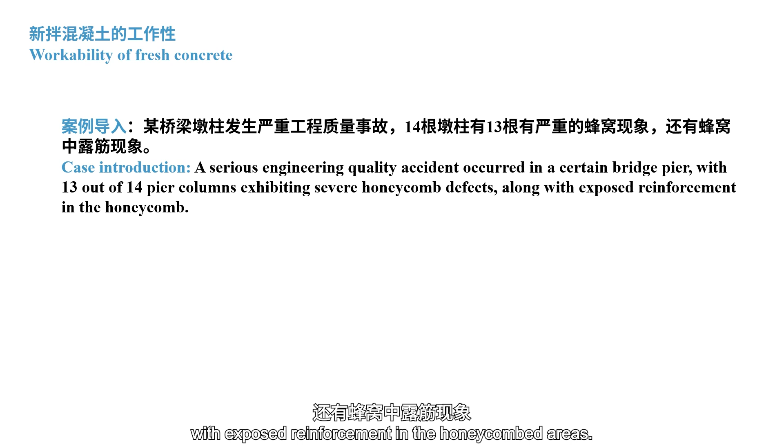Let's look at a real case. A serious engineering quality accident occurred in a bridge pier, where 13 out of 14 pier columns exhibited severe honeycombing, with exposed reinforcement in the honeycombed areas. Concrete was found to be involved in the following issues during the construction review.

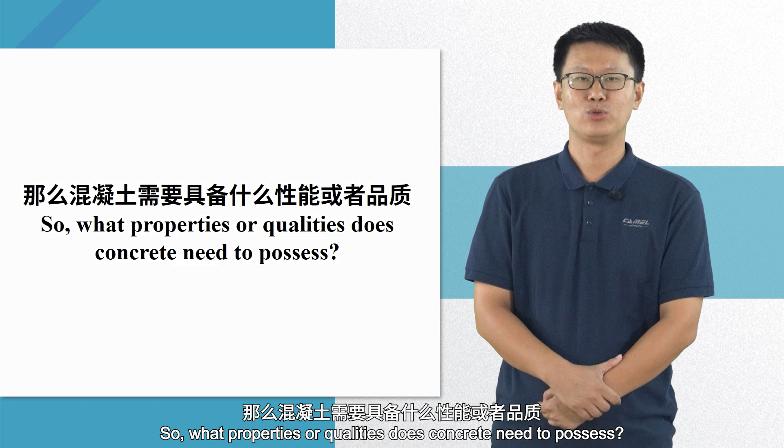So, what properties or qualities does concrete need to possess? Today, the teacher will reveal them one by one to the students. Concrete is an artificial stone, formed by mixing cementitious materials, aggregates, water, and appropriate admixtures and additives, and then hardening.

Considering factors such as the structural characteristics of buildings, properties of raw materials, construction techniques and equipment, construction environment, and quality management, fresh concrete needs good workability for mixing, transporting, pouring, and compacting. Hardened concrete, after curing and solidification, requires sufficient strength, certain deformability, and excellent durability to ensure long-term safety use.

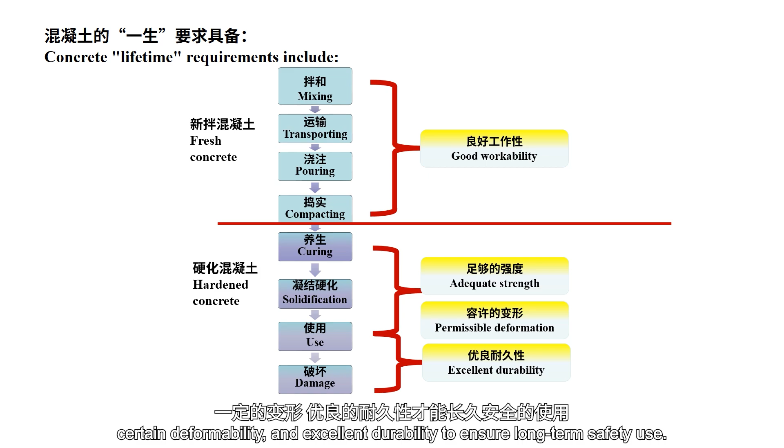Next, we will learn about the properties of fresh concrete workability, also known as its ability to be worked. First, let's look at the definition of workability. Concrete's ability to be easily worked during all stages of construction, ensuring uniform quality and cohesion of its components, and compactness of its form. The workability of a concrete mix indicates the ease of construction operation and its resistance to segregation.

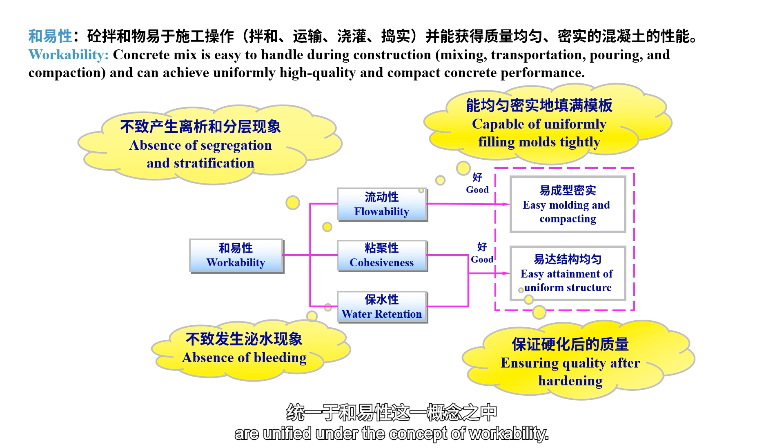Workability is a comprehensive concept composed of properties such as fluidity, cohesion, and water retention. The interrelationship and contradiction among these properties are unified under the concept of workability. Fluidity, also known as consistency, refers to the ability of a concrete mix to flow and fill molds uniformly, under its own weight or during compaction by construction machinery, reaching all corners evenly.

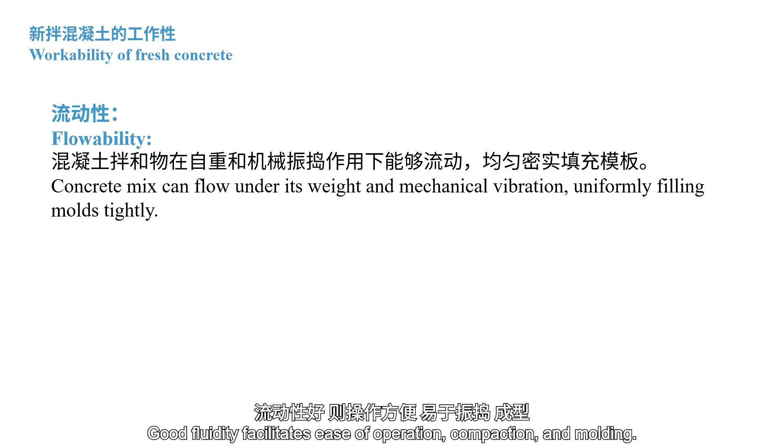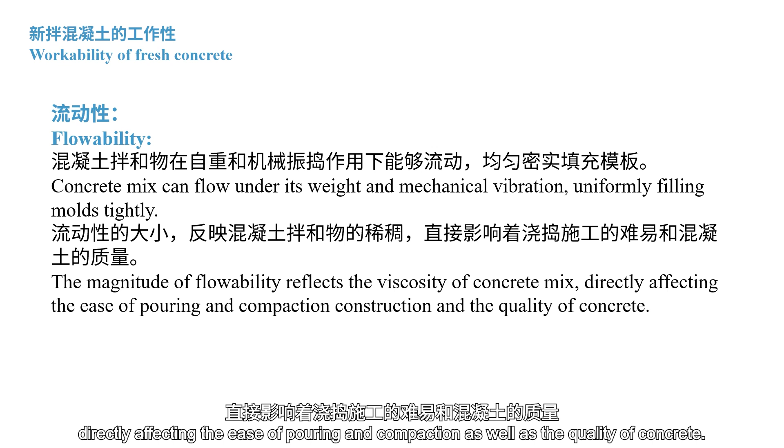Good fluidity facilitates ease of operation, compaction, and molding. The magnitude of fluidity reflects the consistency of the concrete mix, directly affecting the ease of pouring and compaction as well as the quality of concrete.

Depending on construction requirements, fluidity is classified as stiff concrete, slump 0 to 10 millimeters, plastic concrete, slump 10 to 90 millimeters, flowable concrete, slump 100 to 150 millimeters, and highly flowable concrete, slump greater than 160 millimeters. The slump of concrete should be determined considering construction conditions, section dimensions of components, reinforcement density, compaction methods, etc.

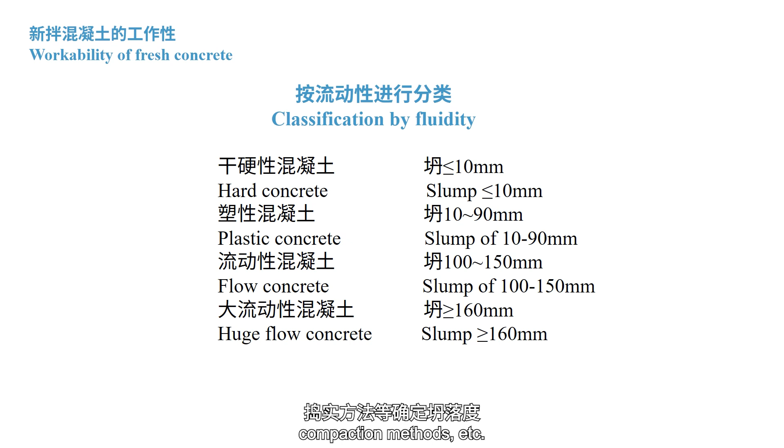Cohesion refers to the ability of concrete mix components to stick together during construction, preventing segregation and maintaining overall uniformity. Good cohesion ensures that concrete mix does not segregate or separate during transportation, pouring, molding, etc., thus ensuring uniform internal structure of hardened concrete. Poor cohesion in concrete mix results in honeycombs and pockmarks after hardening. In large concrete mixes, even dog holes may appear.

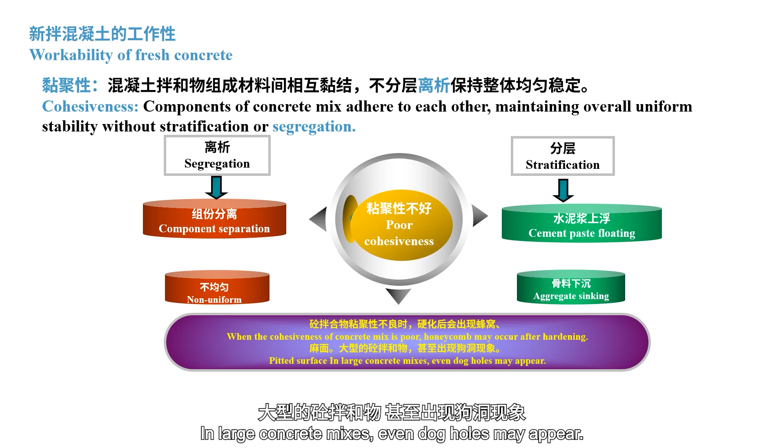Water retention refers to the ability of concrete mix to retain water and prevent its separation. Concrete mix with poor water retention allows water to easily migrate from the interior to the surface, forming channels, which reduces the compactness of concrete and leads to shrinkage cracking, ultimately reducing its strength and durability. Water retention reflects the stability of the concrete mix.

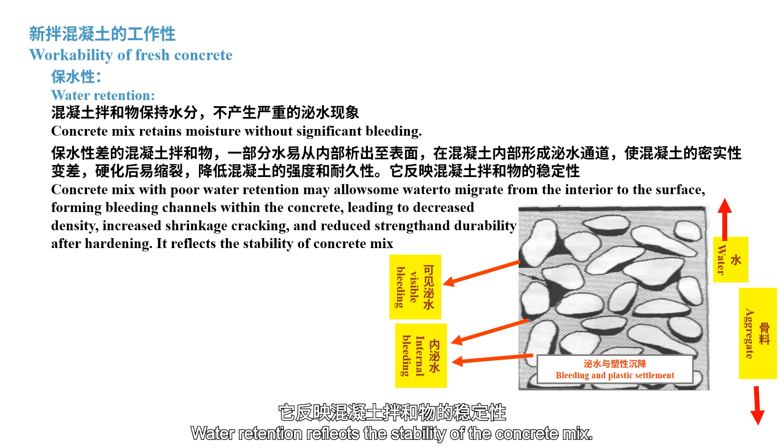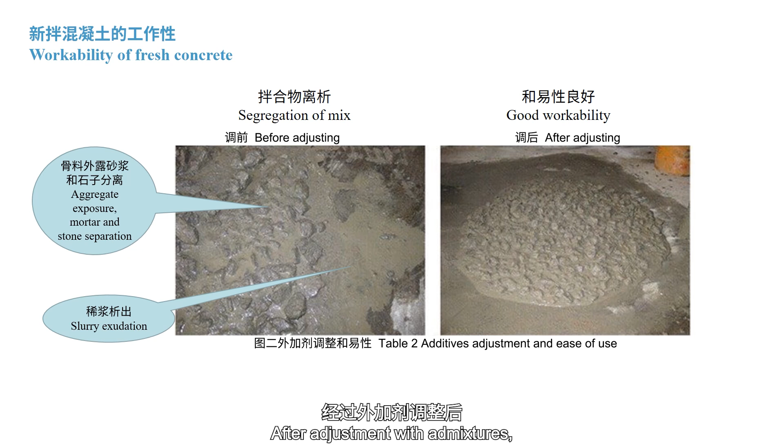Everyone, please look at the left picture where concrete mix exhibits segregation and bleeding, with exposed aggregates and sand separation, indicating poor workability. After adjustment with admixtures, the concrete performance improves in the right picture. Concrete with poor workability tends to develop honeycombs, pockmarks, voids, and even exposed reinforcement after hardening, affecting the quality of construction projects.

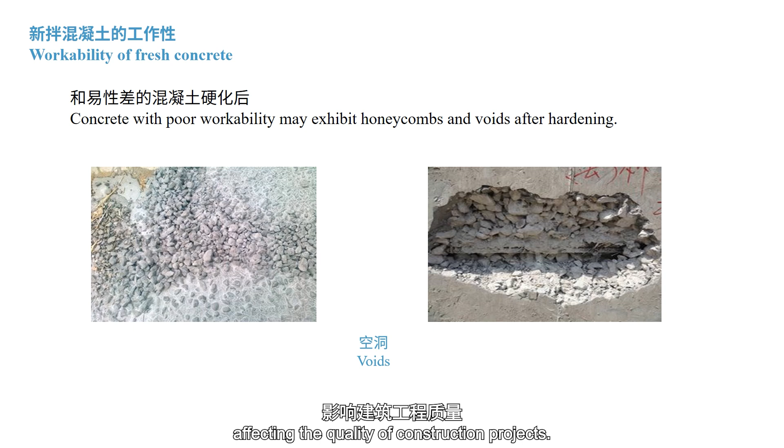The fluidity, cohesion, and water retention of concrete mix are interrelated yet contradictory. These properties are not mutually consistent under all circumstances. For example, increasing the water content can improve the fluidity of concrete, but it may not necessarily enhance its cohesion and water retention. Good cohesion often corresponds to good water retention, but when fluidity increases, cohesion and water retention tend to decrease and vice versa.

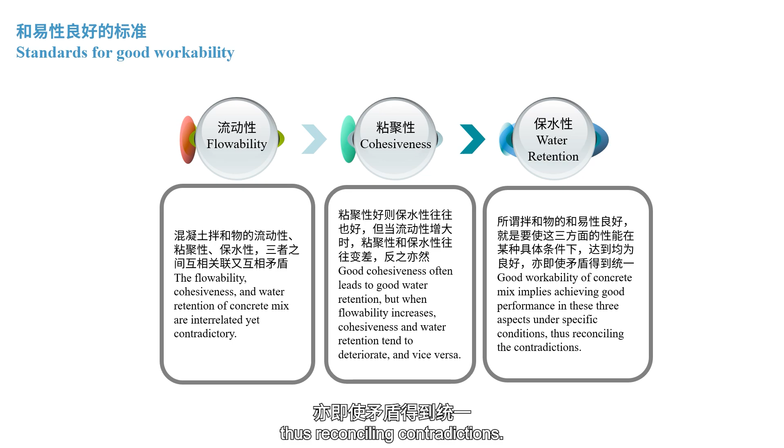Good workability of a concrete mix means achieving good performance in all three aspects under specific conditions, thus reconciling contradictions. In general, using more water tends to decrease the strength and quality of concrete. Therefore, workability cannot be assessed by a single criterion. It requires a comprehensive evaluation based on several indicators.

Workability of concrete mix is typically assessed by measuring its fluidity, supplemented by empirical evaluation of cohesion and water retention to determine workability. The fluidity of concrete mix should be measured according to GB/T50080-2016, Standard Test Methods for Performance of Ordinary Concrete Mixes. The magnitude of fluidity is indicated by the slump, or Vebe Consistency Index.

The slump test is applicable to concrete mixes with maximum aggregate size not exceeding 40 millimeters and slump values not less than 10 millimeters. The Vebe consistency test is used to determine the workability of stiff concrete mixes.

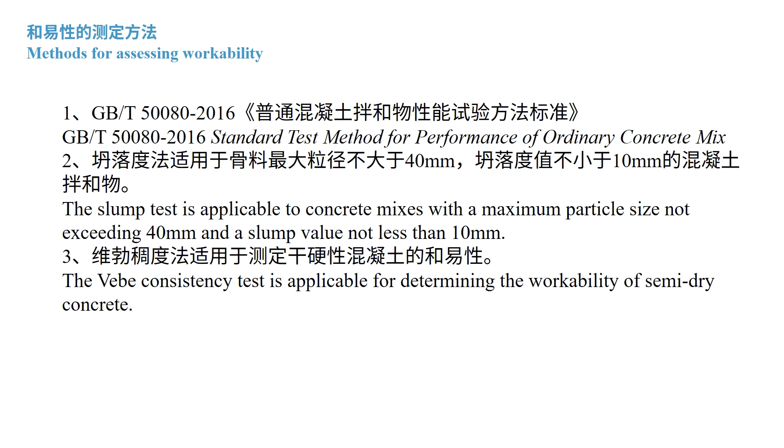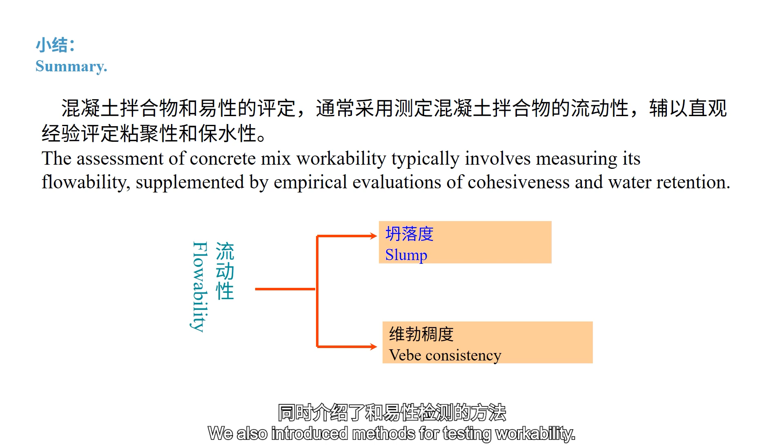Alright, today we focused on explaining the concept of concrete workability and the standards for good workability. We also introduced methods for testing workability. Now let's think. Under what circumstances should the slump test be used for concrete slump measurement? And when should the Vebe consistency test be used?